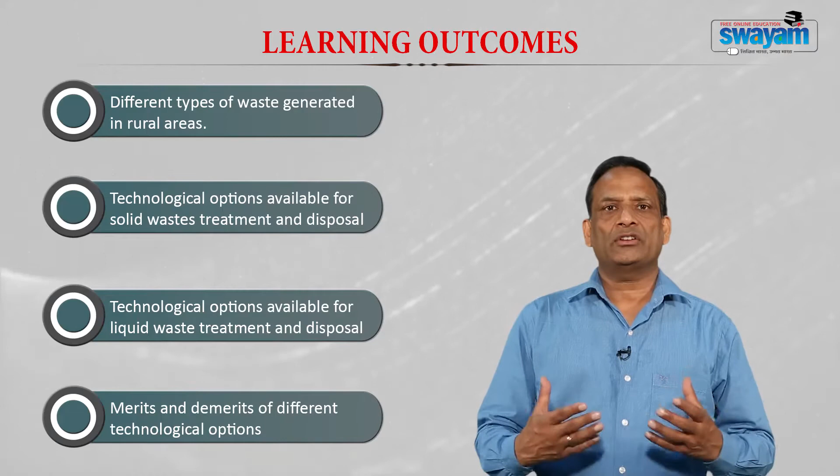Water, sanitation and hygiene directly impact human health and have far reaching consequences if ignored. India is one of the fastest developing economies, but when it comes to sanitation, water and hygiene indicators, it continues to lag behind.

With a population of over 1.3 billion, there is a mounting and urgent need to address the sanitation issue. In the previous module, you studied in detail the efforts going on at the national level, and past efforts made for waste management in rural parts of India.

Solid and liquid waste management is one of the key components of Swachh Bharat Mission Rural, which was launched to ensure cleanliness, hygiene and better quality of life in rural areas.

As discussed earlier, as long as we do not know what waste is and its classification, it will be difficult to apply any technology for its management. Waste is any unwanted or unusable substance that is discarded after primary use by the user. Wastes are generated from human as well as animal activities.

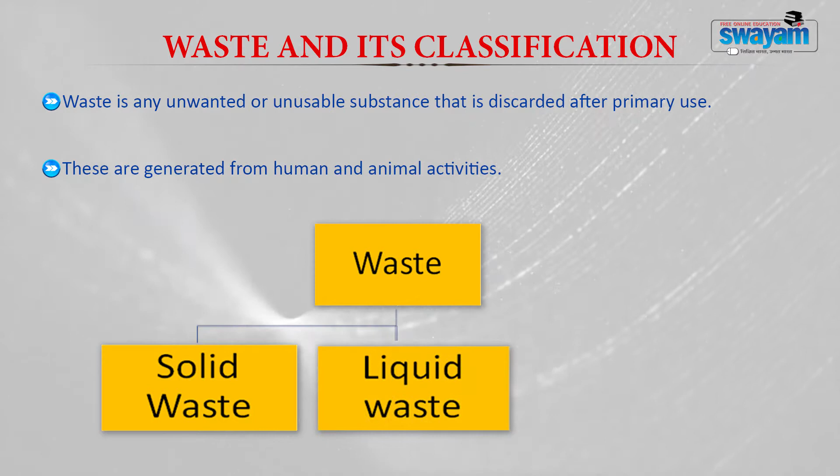Let me come to solid waste. Solid waste is any unwanted material disposed of by human activities that can neither flow in water streams nor escape into the atmosphere immediately in gaseous form. This is called solid waste.

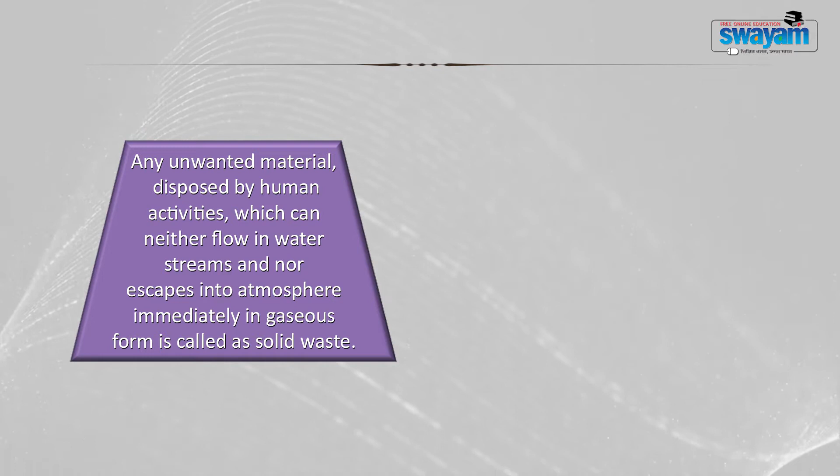Solid waste generation rates and characteristics differ from community to community depending on lifestyle, climate, economic status, industrial activities, agricultural activities, etc. The details of solid waste you have already studied in the first week of this MOOC course, in modules number 1, 2 and 3.

Solid waste is generated from a number of sources. The various sources from which solid waste is generated are shown in this figure, and these include agricultural sources, municipality services, construction and demolition activities, waste treatment sites and wastewater treatment plants, residential areas, commercial activities, institutions and industries, all of which produce solid waste.

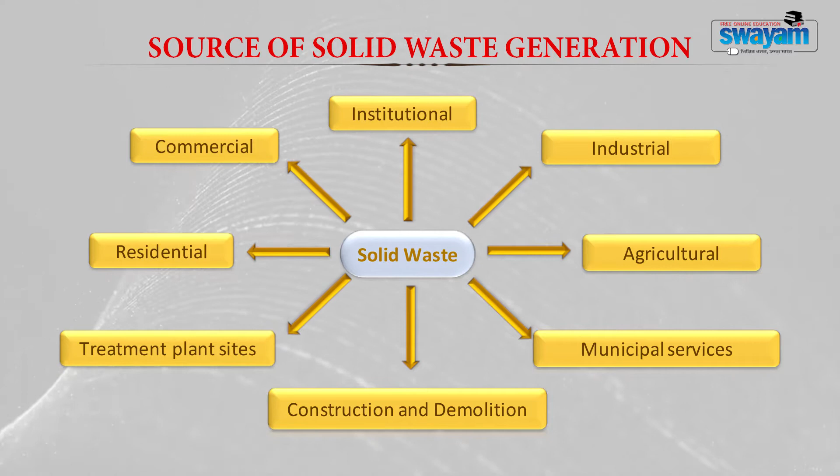As this module is on rural areas, let me come to the sources of solid waste in rural areas.

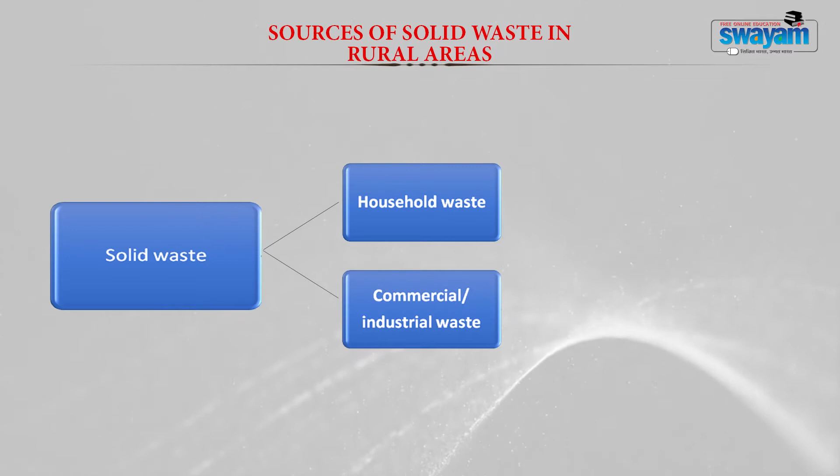In rural areas, there are two major sources of solid waste. One is household waste generated from various domestic activities, and the second is commercial and industrial waste generated from different commercial activities going on in the rural areas.

Household waste may contain food waste, animal waste or animal excreta, recyclable materials like plastic, metal, glass, etc., then non-recyclable materials, agricultural waste such as crop residues, and street sweepings.

Commercial and industrial waste may contain institutional waste generated by different institutions located in rural areas, waste generated by rural industries, waste generated by shops and business activities, and waste generated by slaughter houses. So these are the major sources of solid waste in rural areas.

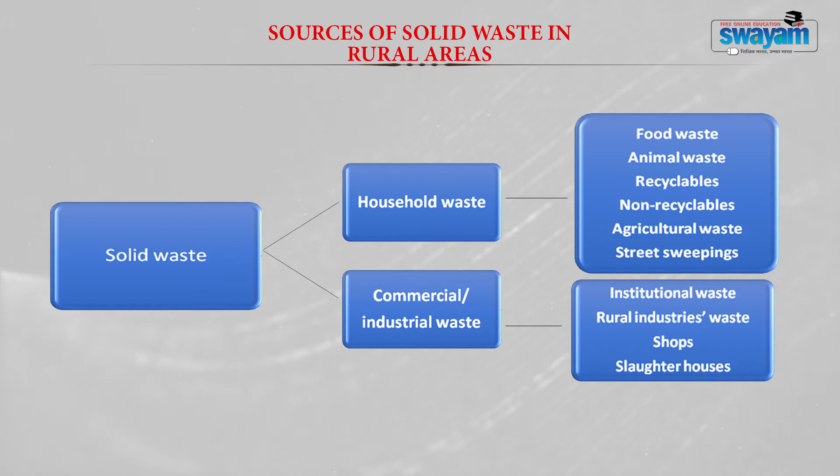If we come to the liquid waste sources in rural areas, again these can be divided into two categories: domestic sources and non-domestic sources.

The domestic sources mainly produce sewage, whereas non-domestic sources may be industries, institutions, as well as agricultural activities. Industries may produce toxic as well as non-toxic liquid waste, institutions generally produce sewage, whereas agricultural activities mainly produce water runoff.

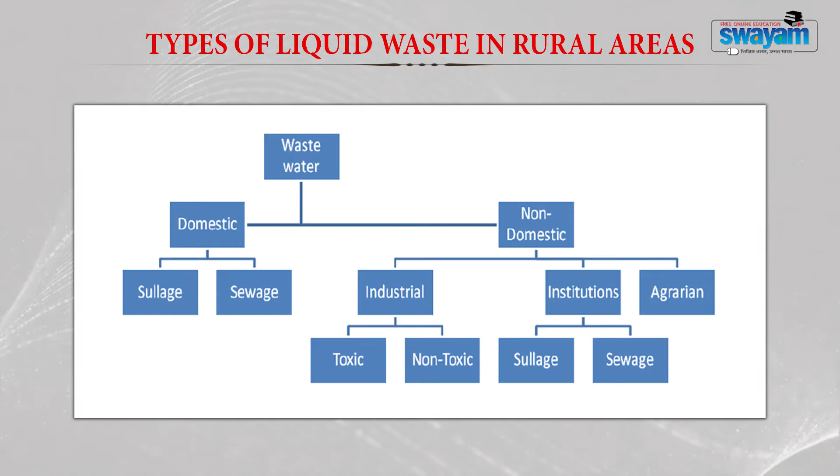About 960 million tons of solid waste is generated annually in India as a byproduct of various activities going on in industries, mining, municipalities, agriculture, and other processes.

Dear student, remember that this 960 million ton figure is not constant; it is going to increase with time because development is going on in the country and the economic status of the people is increasing.

It has also been estimated that rural people in India generate liquid waste, that is grey water. You might know the difference between grey water and black water. Grey water is waste water generated from our houses other than toilets, whereas the waste water generated by toilets is called black water. The total quantity of grey water generated in India is approximately 15,000 to 18,000 million liters.

And solid waste, which is mainly organic and recyclable, is of the order of 0.3 to 0.4 million metric tons per day.

So we can say that huge quantities of solid waste are generated in rural India, and most of this is organic, biodegradable, or putrefiable in nature.

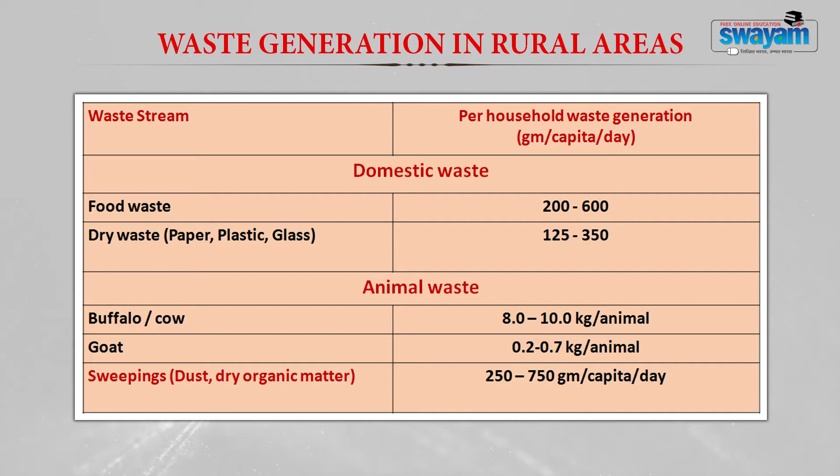We know that to decide upon the technical option to be used for waste management, we must know the constituents present in the solid waste.

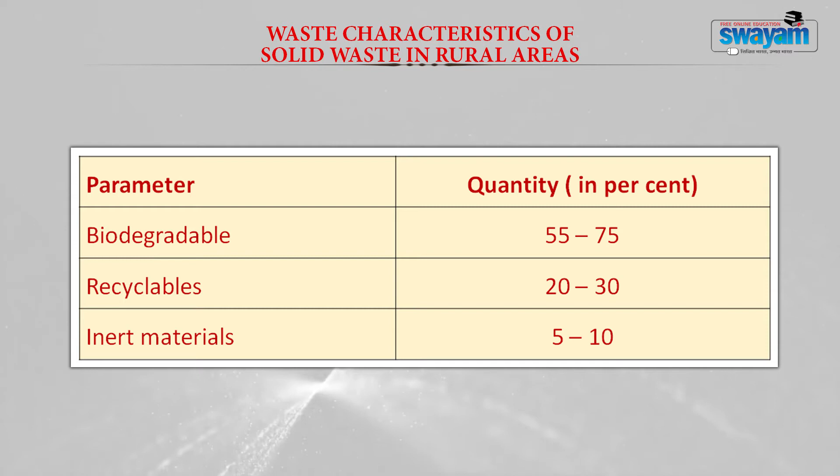Based upon this composition, we can decide the kind of method used for solid waste disposal in rural areas. Let's look at the traditional methods. The most common method is open dumping, where heaps of waste are made in the outskirts of the village by households, and once or twice a year that waste is dug out and used as manure in the agricultural fields.

The second very common traditional method to get rid of waste is open burning. Open burning is a very dangerous method, and it leads to air pollution.

The third most common method is disposal of solid waste in water bodies nearby the village, such as a village pond, a river, or a canal. The fourth most common method in rural areas is disposal of solid waste in agricultural fields, which is also very dangerous.

Dear student, you have already studied in module number 3 the harmful effects of traditional methods of waste disposal. I suggest you have a relook at the harmful effects of these non-scientific methods of solid waste disposal.

Let's look at the traditional methods used for liquid waste disposal in rural areas. Liquid waste is generally disposed in a pit near the house, or disposed in the open near the house. Both these methods are not recommended, because they attract different pathogens, vectors, and disease-causing organisms like house flies, etc.

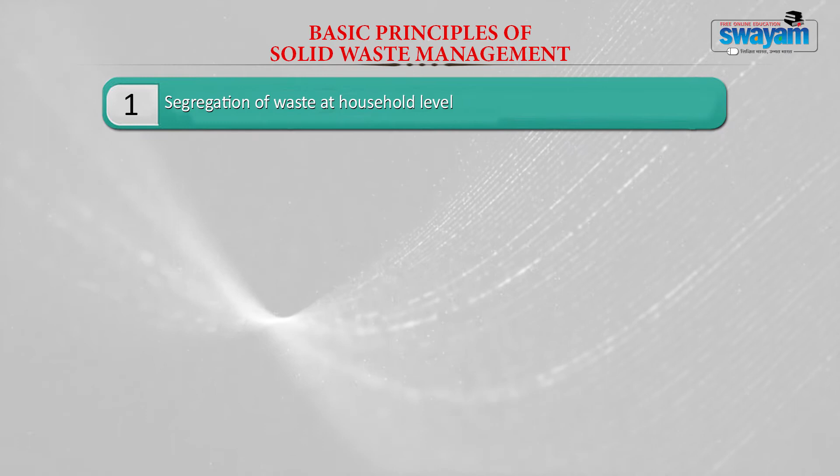What are the basic principles of solid waste management? Segregation of waste at household level, reuse of recyclable materials, waste treatment at the household if land is available, and community systems for treatment and disposal of waste if land is not available to the household. Generally, waste should be managed at household level if land is available, and should go to community systems only if land is not available.

Technical choices should be limited to those that are simple, easy to maintain, and not very capital or operation intensive. People should have the habit of using processed waste like compost, biogas, etc. All technologies cannot be used for all kinds of waste.

So what are the criteria for selection of technology for waste treatment? There are several criteria, including availability of space near houses and housing pattern in the rural area, geophysical condition of the village including topography, soil structure and groundwater conditions, sources and pattern of water supply, whether individual or public water supply, and availability of common space in and around the village.

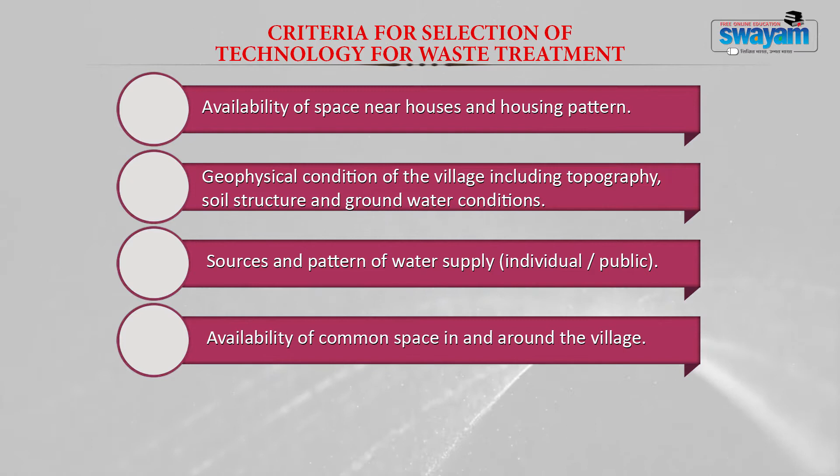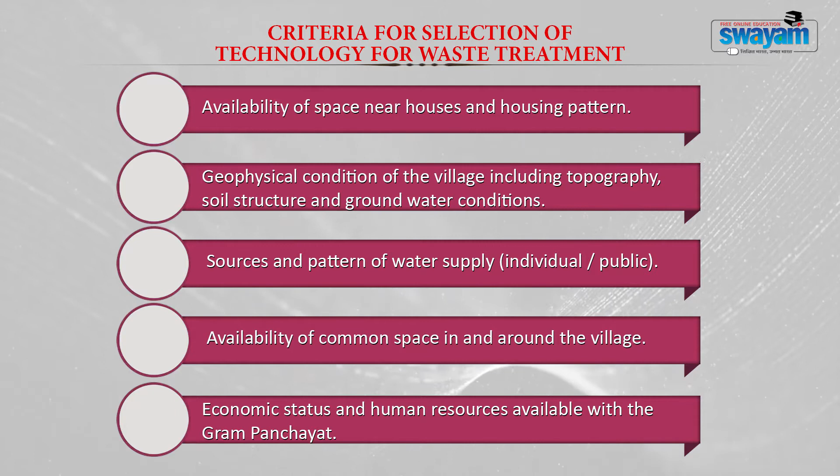From the discussion we have done till now, we can say that there can be two types of waste management systems in the rural areas: household management systems and community waste management systems.

Depending upon the composition of the waste which we studied just now, biological methods are best suited to household waste management in rural areas, whereas for community waste management, since this is the same waste, biological methods are an option.

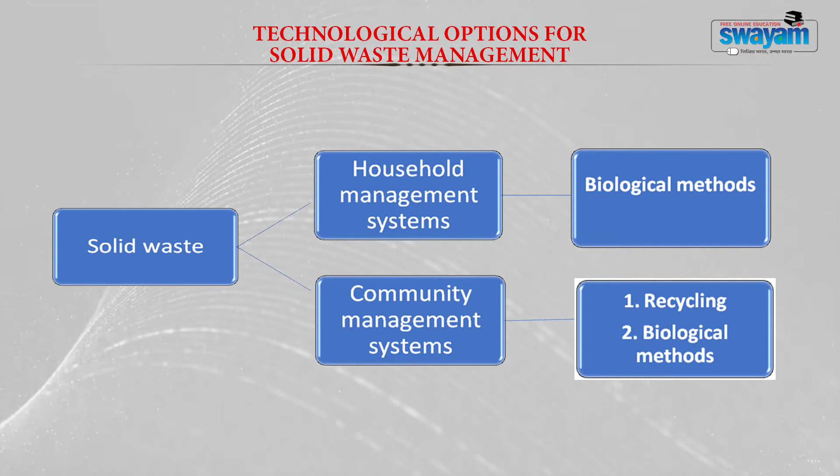And for non-biodegradable waste, recycling is another option. So what are the biological solid waste treatment and disposal methods available to us? One method is composting, which you have already studied in detail.

In composting, the waste can be converted into manure, which can be used in agricultural fields to maintain soil fertility and health. There are several composting methods: NADEP method, Bangalore method, and Indore method. Although you have studied these in the previous module, here we will discuss them briefly.

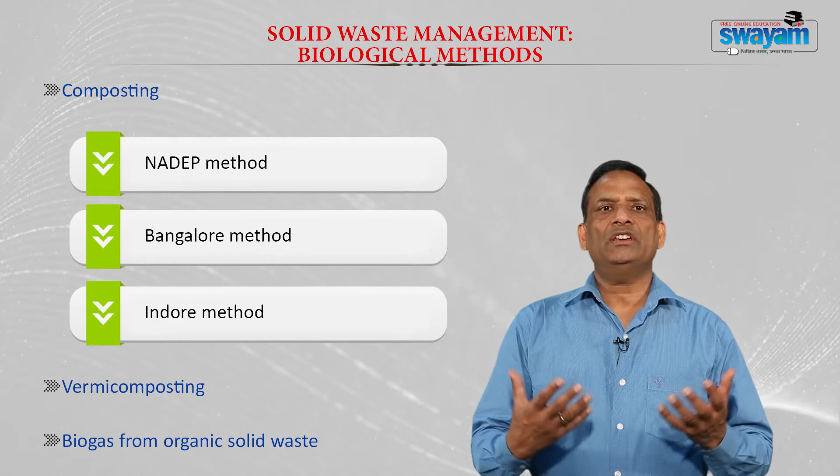Another biological method available for treatment and disposal of solid waste is vermicomposting, which you have also studied in detail. The third option available to us is production of biogas from the organic fraction of the solid waste, which has also been studied by you in detail.

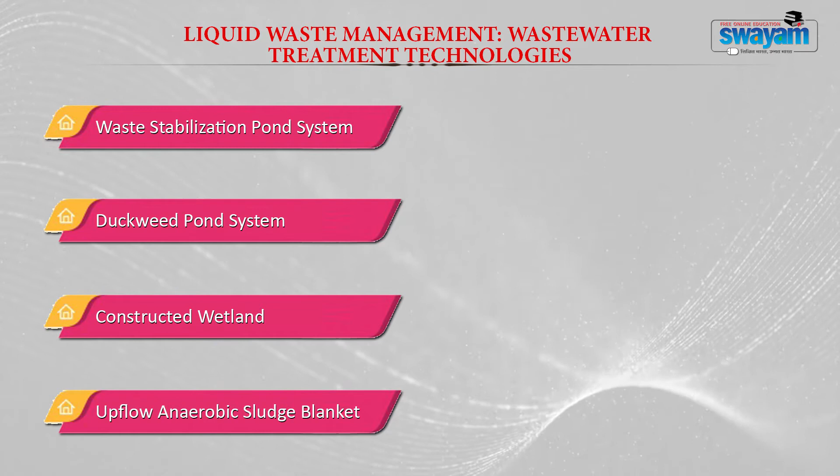As far as liquid waste is concerned, a number of options are available for liquid waste management in rural areas at the community level. These wastewater treatment technologies include waste stabilization pond system, duckweed pond system, constructed wetland, upflow anaerobic sludge blanket, anaerobic baffled filter systems, package aeration system, sequencing batch reactor system, and soil biotechnology.

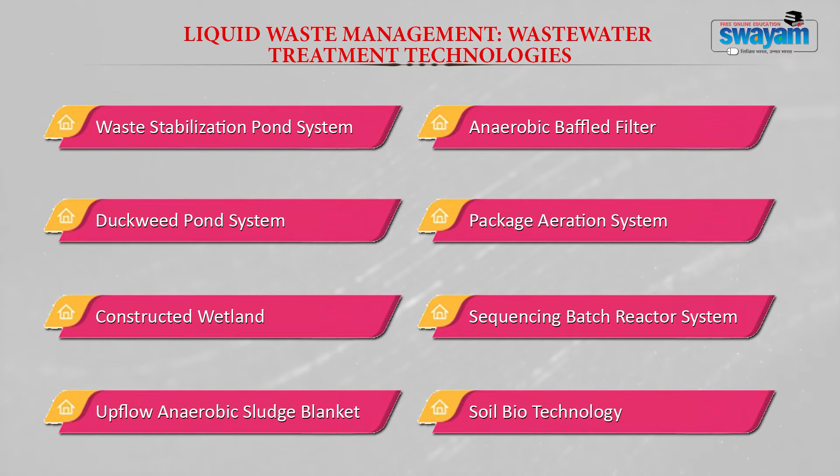Let me have a look at different methods which we have suggested for rural areas. First, let me come to the NADEP method. In this method, composting takes place in a rectangular brick tank with aeration holes. Organic material is added in layers and compost is ready in almost 3 months.

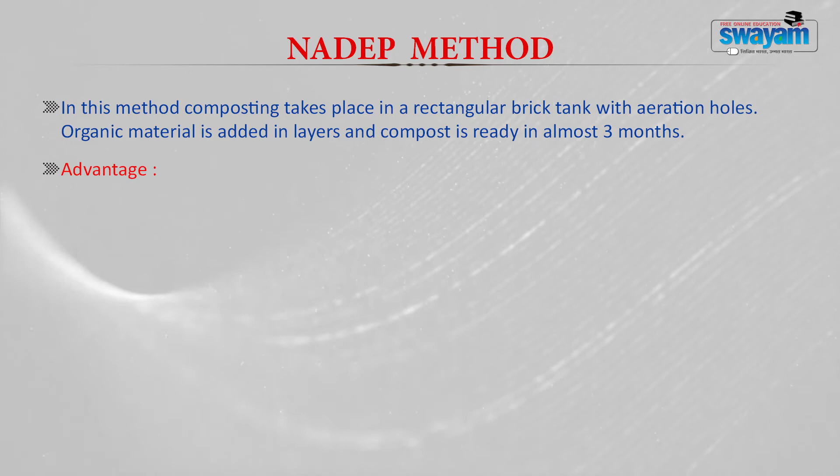Advantages of the NADEP method: composting can be done on a large scale compared to using piles, and all nutrients are retained in the tank, so the resulting compost is more nutrient rich. Disadvantages include that tanks work in a 3-month rotation, so we need at least 2 tanks, which increases the cost of the process.

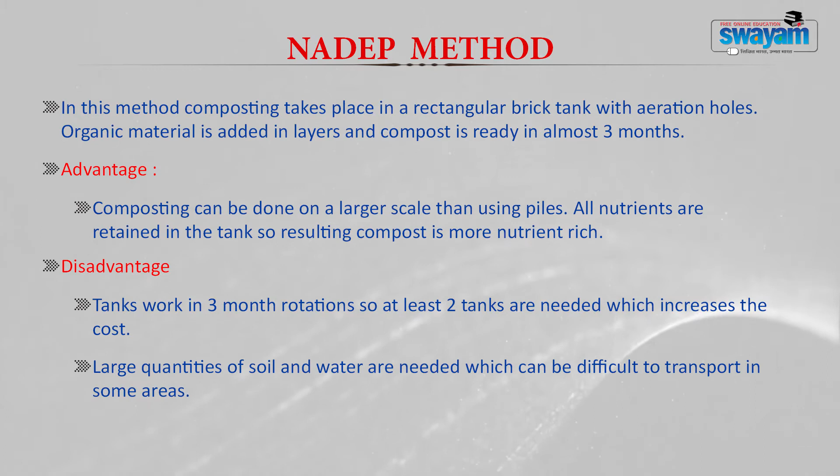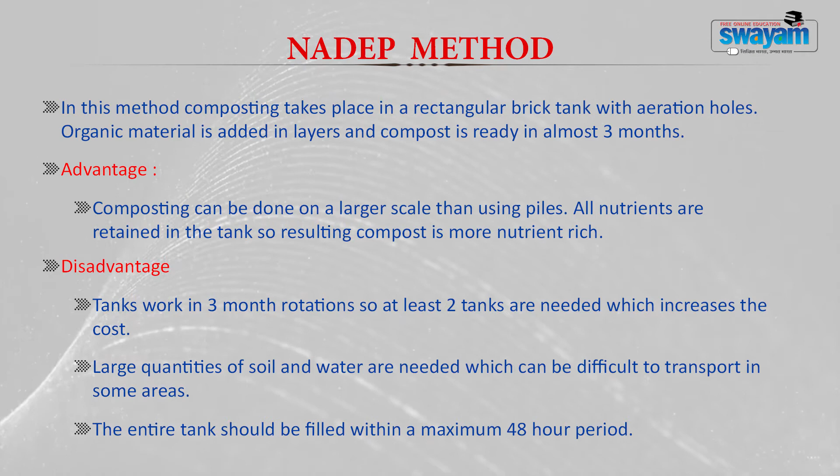Large quantities of soil and water are needed, which can be difficult to transport in some areas, or sometimes this water may not be available. In this method, the entire tank should be filled within a maximum 48-hour period.

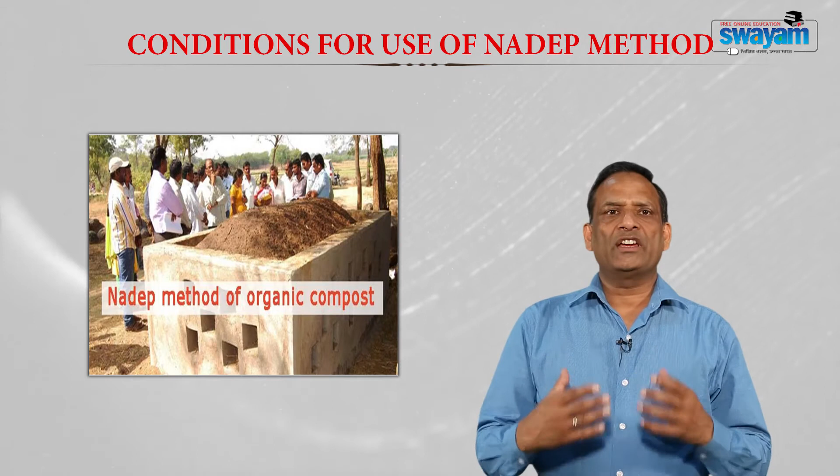Conditions for use of the NADEP method: tanks can be built in all conditions. The thatched roof protects the tank from moisture or rain. The tank should be monitored to check for cracking of the seal that would allow moisture to escape. Tanks require space and a lot of initial material, so a community approach is better, using a communal space for the tank and agreeing on a date for bringing material and filling the tank.

The second composting method is the Bangalore method of composting. In this method, waste is composted anaerobically in a pit, and compost is ready in 6 to 8 months.

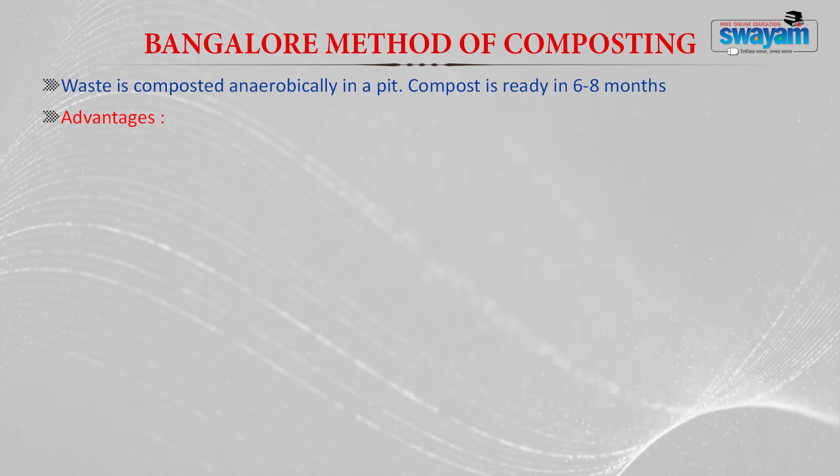Advantages of the Bangalore method: household waste and night soil, that is the fecal matter of human beings, can be used as raw material, and this method is good for dry areas. Disadvantages: this method cannot be used in wet areas as the pit may become waterlogged. Gases produced during the Bangalore method can smell, the pit requires quite a large space, and the composting process is slow.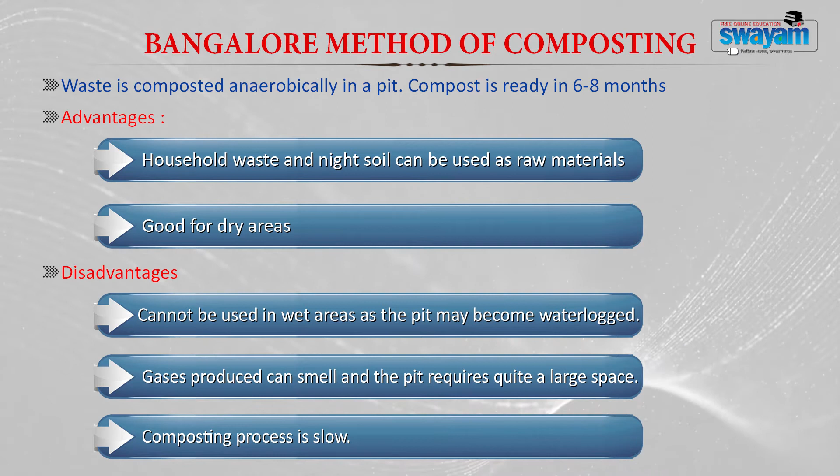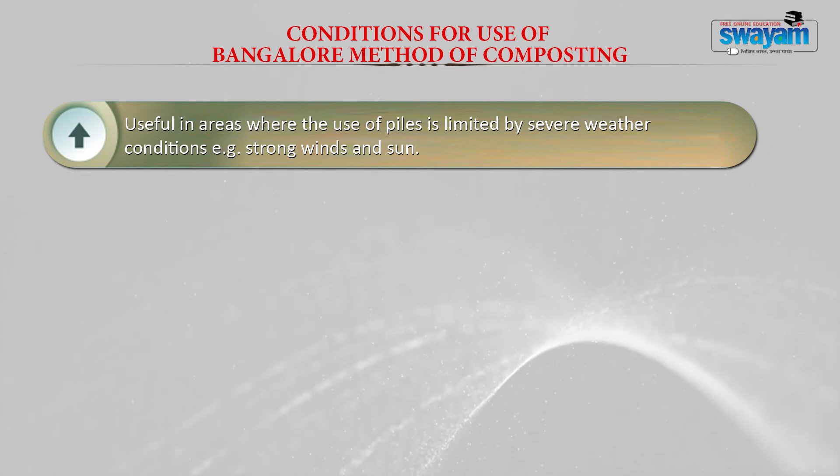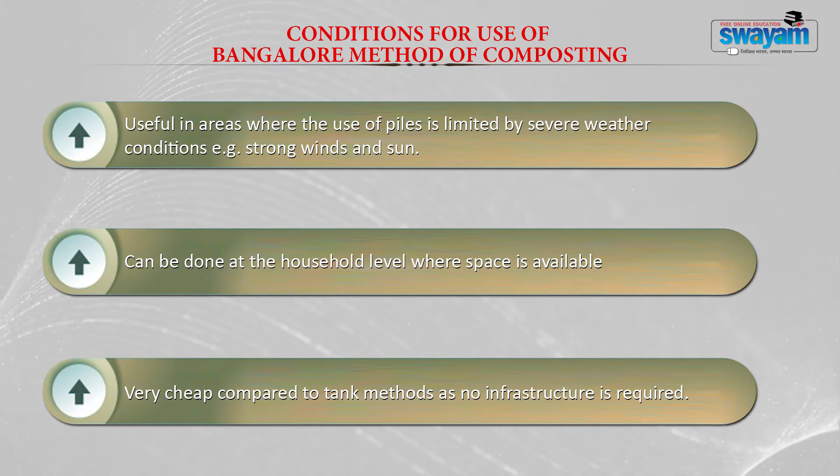Conditions for use of the Bangalore method of composting: this method is useful in areas where the use of piles is limited by severe weather conditions, for example strong winds and sun. This method can be done at the household level where space is available, and it is very cheap compared to tank methods, as no infrastructure is required.

Another approach is the Indore method of composting. In this method, waste is cut into small pieces and arranged in 10 to 15 centimeter thick layers above ground or in a pit. Compost is ready in 4 months.

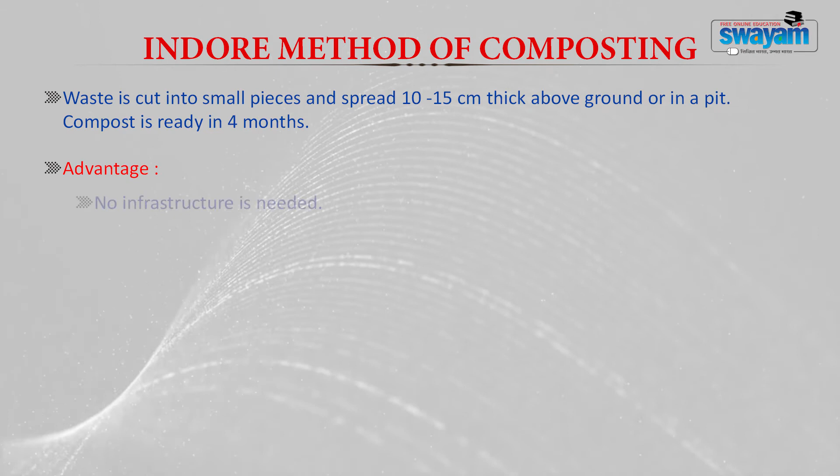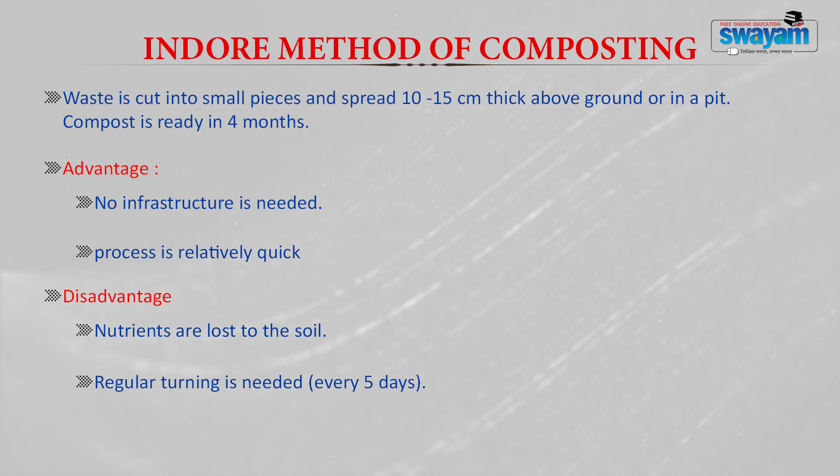Advantages of the Indore method: no infrastructure is needed, and this process is relatively quicker than the Bangalore method. Disadvantages: in this method nutrients are lost to the soil, regular turning is needed meaning it is a labor-intensive process, and this method cannot be used in areas with heavy rainfall due to waterlogging in the pit.

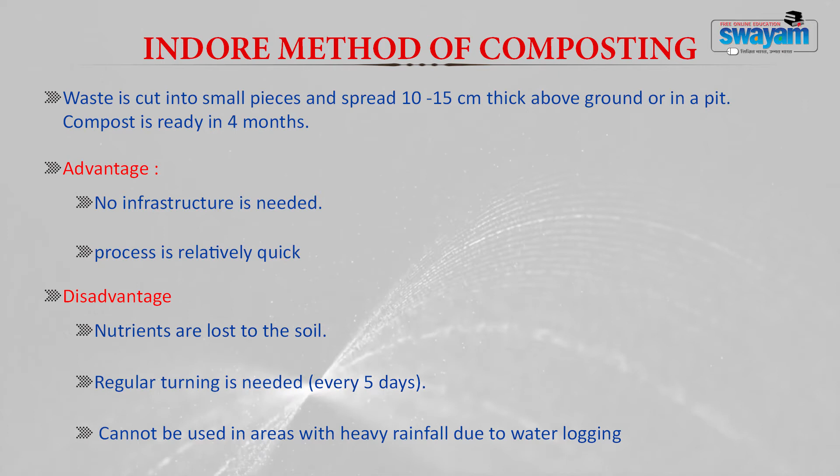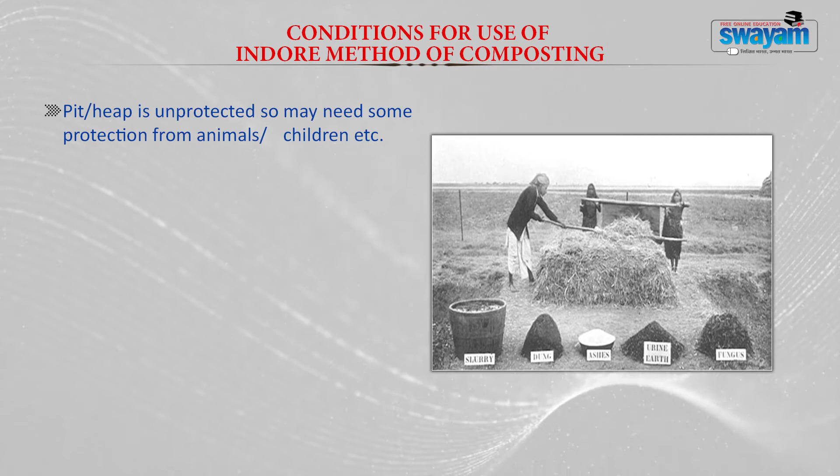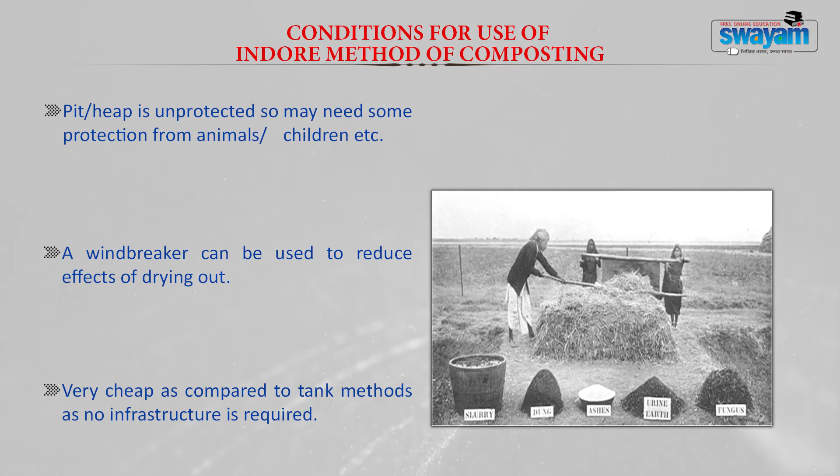Conditions for use of the Indore method of composting: the pit and heap are unprotected, so some protection from animals and children may be needed. A windbreaker can be used to reduce the effects of drying out. This method is very cheap compared to the tank method, and no infrastructure is required.

Vermicomposting is carried out using earthworms. Earthworms break down waste into vermicompost, which is ready in 3 to 4 months. Vermicomposting is more efficient than normal composting and produces nutrient-richer compost.

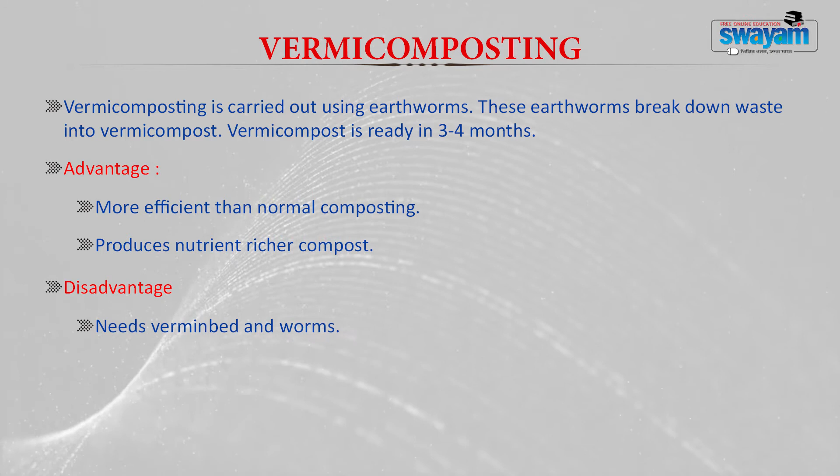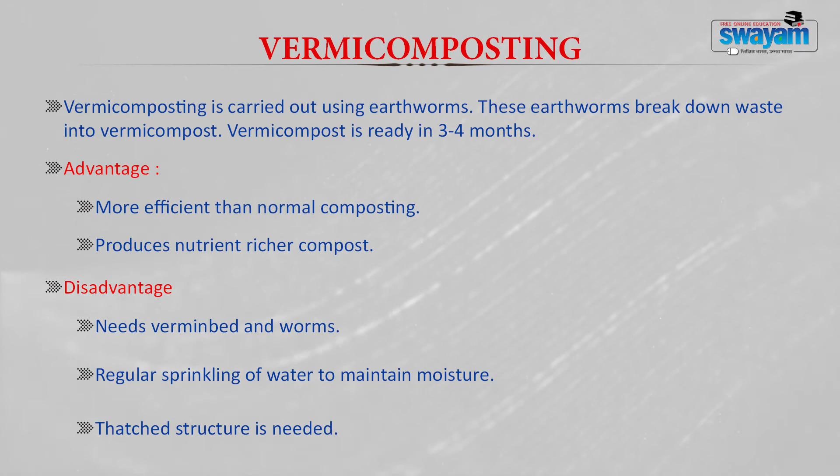Disadvantages of vermicomposting: we need vermi beds as well as earthworms, meaning there is an initial investment. Regular sprinkling of water is required on the vermi bed to maintain moisture, and a thatched structure is also required to protect the vermi beds from direct sun and light.

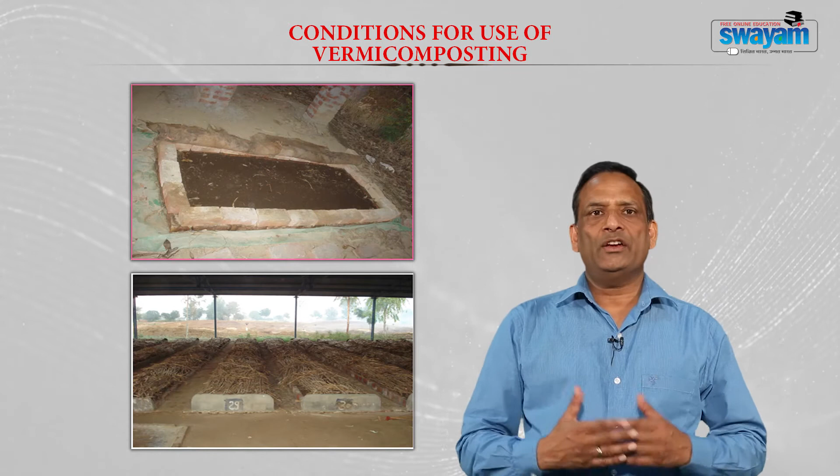Conditions for use of vermicomposting: earthworms are sensitive to temperature. Very low or very high temperature may affect the growth and feeding rate of earthworms, which ultimately affects the output of the vermicomposting process. We also have to maintain optimum moisture during the vermicomposting period.

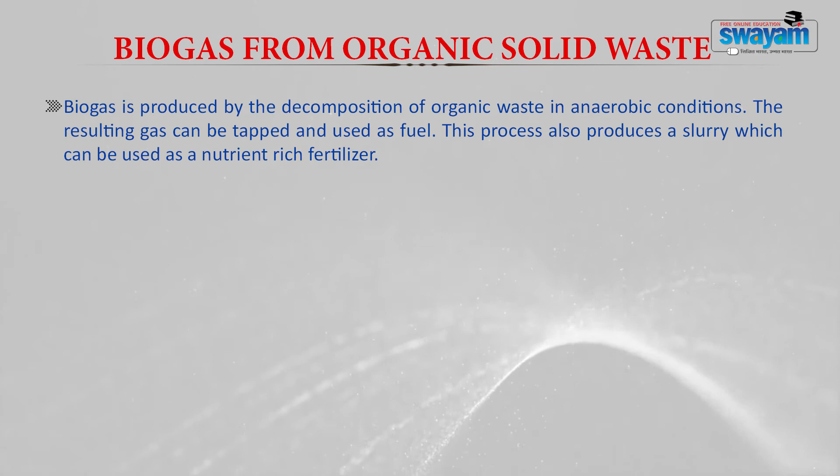Another option is biogas production using the organic fraction of solid waste. Biogas is produced by the decomposition of organic waste under anaerobic conditions, and biogas contains methane, which acts as fuel. The resulting gas can be tapped and used as fuel in our kitchens or for other domestic activities in rural areas.

This process also produces a slurry, and that slurry is nutrient rich and can be used as a nutrient fertilizer or as manure in our agricultural fields.

Advantages of this biogas technology: biogas can be used as clean domestic fuel, which ultimately improves the health of rural women. The slurry produced during biogas production can be used as manure in agricultural fields.

Disadvantages: the initial investment is high to construct a biogas plant, and biogas production is slower in winter.

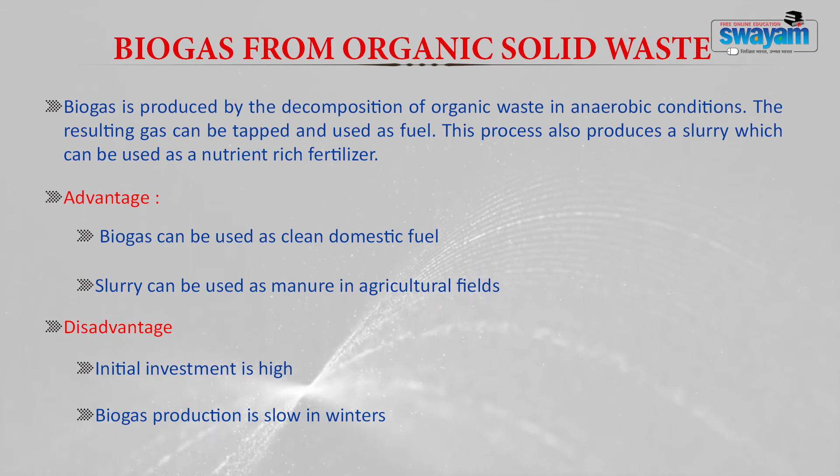Conditions to use a biogas plant: it can be linked to family or community toilets, or it can be a standalone system to which wastes are added. In a biogas plant we can use animal dung as raw material, as well as community toilets or household toilets as a raw material source.

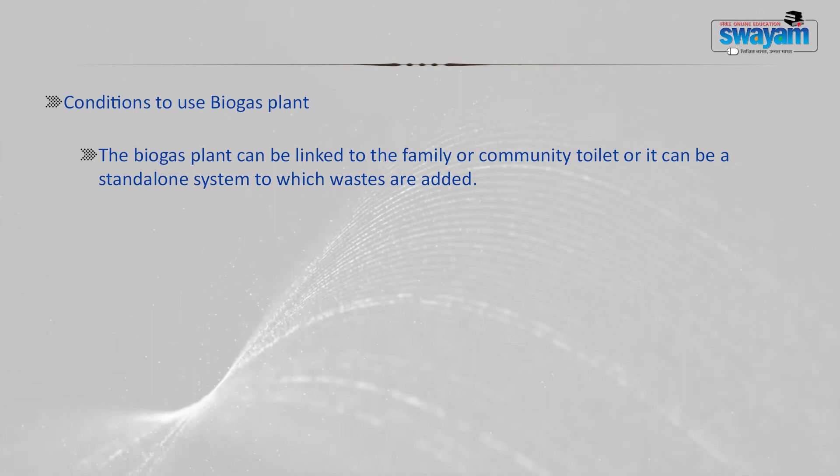There are many different designs available for biogas systems, which you have already studied in the module on biogasification. The choice of design will be influenced primarily by the desired capacity, the space available to install the biogas plant, the type of feed material available—whether cow dung or human excreta—and the finances available to the household or to the village panchayat for construction.

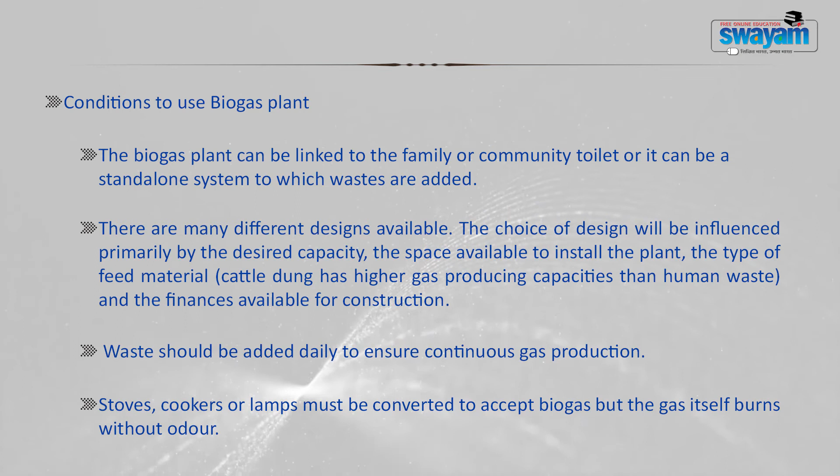Biogas plants in India are generally of three different capacities. One is the family type, having 3 to 5 cubic meters. Second is the community type, having approximately 100 cubic meters. Third are bigger industrial plants, which may have up to 600 cubic meters.

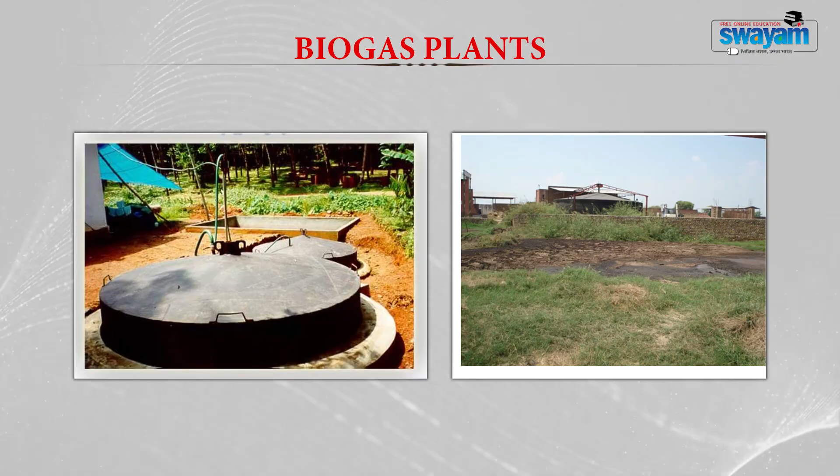Dear students, I suggest you visit any biogas plant existing in your vicinity and try to make a list of the different raw materials used in that plant. Also try to find out how the slurry is used or managed by that biogas plant holder.

The second component of this module is technological options for treatment of liquid waste in rural areas. These options are beyond the scope of this module; you will study them elsewhere in the paper on wastewater treatment technologies, but I will give you a brief idea of these methods.

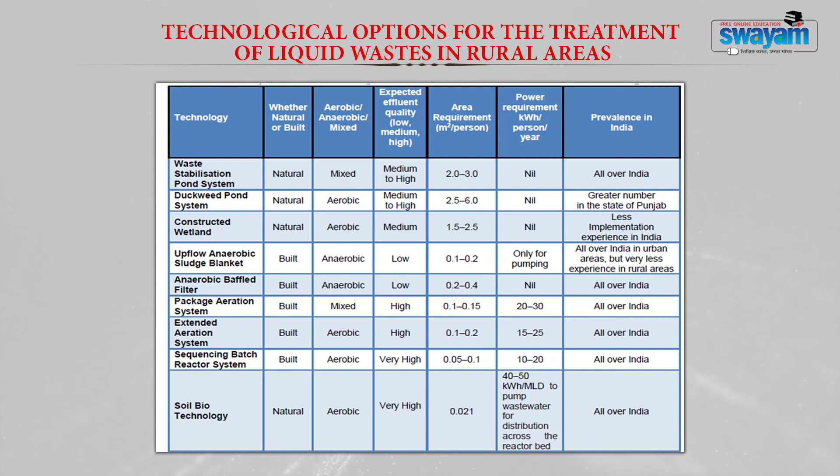To summarize this module, we have studied about the characteristics of solid and liquid waste, and we also learnt that knowledge of these characteristics is very important, because based upon that we can decide what kind of treatment option or what kind of technology can be used.

Dear students, in the last two modules we have learnt about Swachh Bharat Abhiyan and different technological options available to us for the treatment of solid and liquid waste in rural areas. I give you one assignment: please go to a village, and based upon the waste, first decide what kind of technological options will be better for that village, and secondly, try to find out the Swachhta index of that village based upon the formula given to you in the previous module.